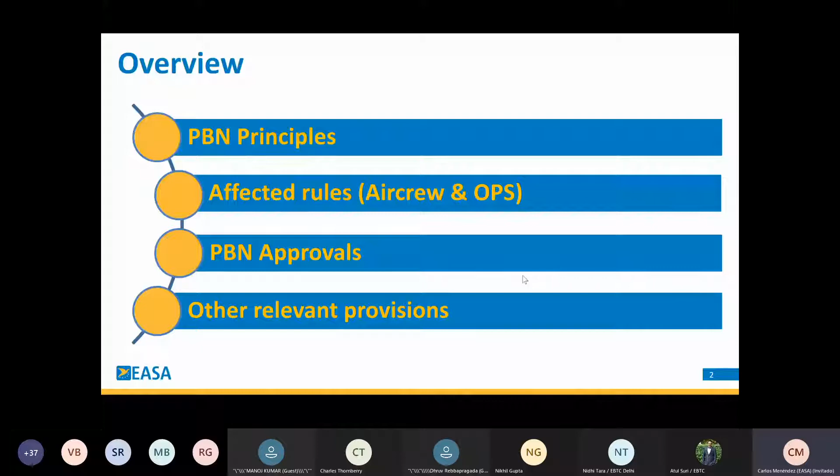The PBN has already been implemented in some countries, and in some it's about to be. This is evolving a lot. There are cost efficiency measures and advantages that should be taken into account, but there are also other challenges related to training and equipment, which is interesting to consider. Talking the same language about this type of procedure is also very relevant and crucial when you try to develop and harmonize these procedures.

So normally when you're trying to include or implement a new technology or development, you need to change a lot of things. In this case we need a specific airspace, and of course we need to implement technology at certain airports. This is also very common when we're talking about new regulations and developments in aviation.

Then you have a new set of regulations, a new set of technical documents, and people need to understand what is going on. Some operators - and I put small operators here, but it's not only the case for them - sometimes it's very difficult for everybody, even other aviation authorities, to understand the principles and implement them. That's another sensitive topic that needs to be addressed when you want to introduce PBN optimization or development in a region or country.

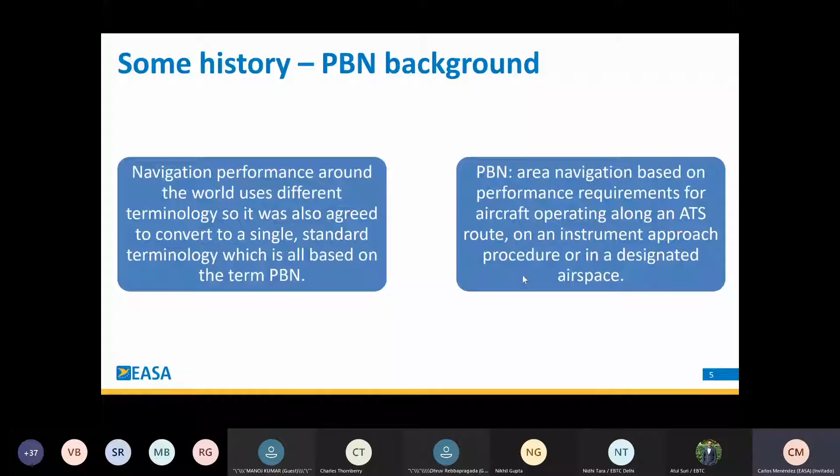So if we're talking about the evolution, and now the recent PBN principles, this is more related to EASA's regulations about PBN. Now we are facing a full integration of PBN into the European regulatory framework, especially for pilot training and air operations. In the past, EASA didn't have the competence to legislate about this, but the regulations in Europe have changed, and now EASA has the mandate to create regulations about this. So PBN regulations are now being developed by EASA.

And now most PBN operations are treated as a normal mode of navigation. In the past, this was the future, but now it is present, and has been for some years the mode of navigation. So now, talking about the requirements for specific approvals.

In the past, there were a lot of approvals needed for different procedures and different types of PBN procedures, but now that has changed, and now what we need is improved pilot training, testing and checking rules, and also performance-based and proportionate operating rules. This change of concept is going to be very interesting, and I think when it's more consolidated, it will create a safer environment, even safer than in the past.

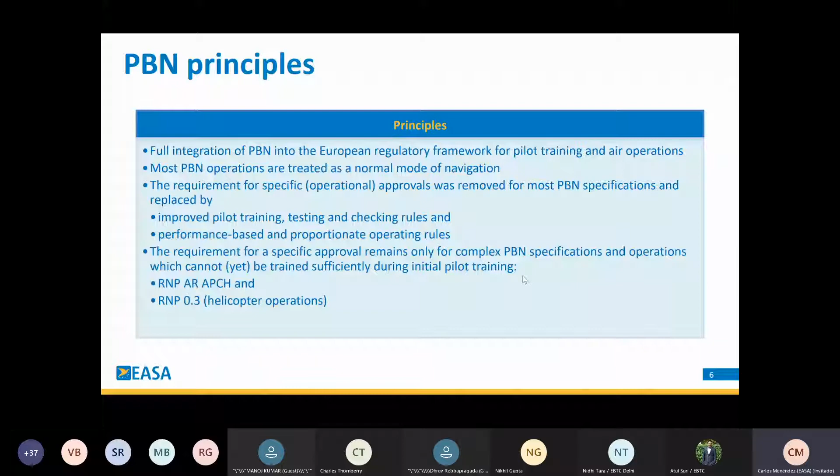So just to highlight four things that are needed to utilize PBN - four main ideas that should be the starting point when talking about PBN utilization and implementation: the aircraft needs to be PBN approved, the operator needs to establish procedures for PBN, the pilot needs to be PBN endorsed, and the airspace requires PBN.

I wanted to highlight this slide because normally when we face the challenges of implementing new technologies or regulations in any aviation domain, we see that we need to involve all the stakeholders. That's the reason why I'm really interested in having all the stakeholders together around the same table or meeting room, or around a screen like today, to exchange different points of view, talk the same language, and share with the rest the difficulties and see how we can improve together.

We need to sit down and understand each other. From the regulatory part, it's very important to be in touch with the stakeholders and to know if they are understanding well, if the regulations are feasible, manageable, and well understood by the rest of the stakeholders.

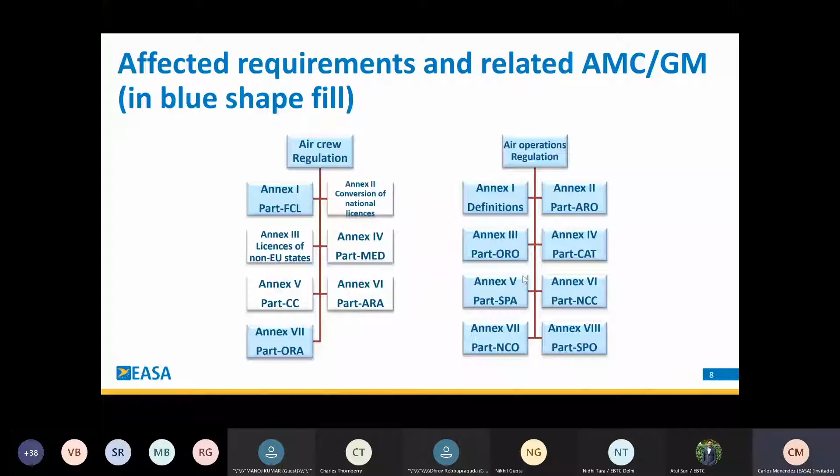There are a lot of initiatives being tested, and some of them already implemented, but making the step of regulating and approving them on a general basis is not easy. The most precise ones are the ones we mentioned before that needed specific approval, the RNP-AR approach, and the 0.3 for helicopters are the ones with more precision. We'll continue to see an evolution of this, using different systems like SBAS, GBAS, and a lot more. We will have more precise approaches like these.

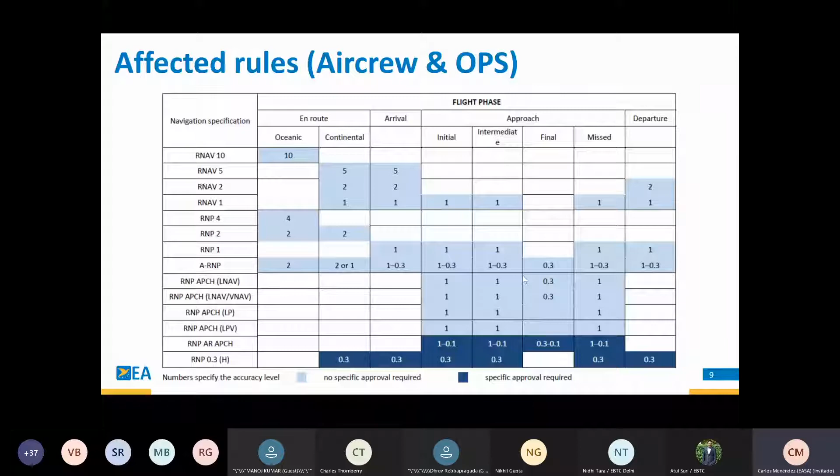Well, that was it from my side today. I hope it was at least a decent presentation. I'm not an air navigation expert anymore, but I tried to do my best. I hope it was interesting for you. If you have any questions, I'll try to answer them later during the Q&A session. Thank you very much.

Yes, thank you very much, Carlos, also for stepping in for your colleague. I think it was a very, very interesting overview. Before we move on to the more technical side, two people have raised their hands, and I would like to have it as interactive as possible. So, Mr. Thakur, you raised your hand, so please come and switch on your camera, and ask your question please.

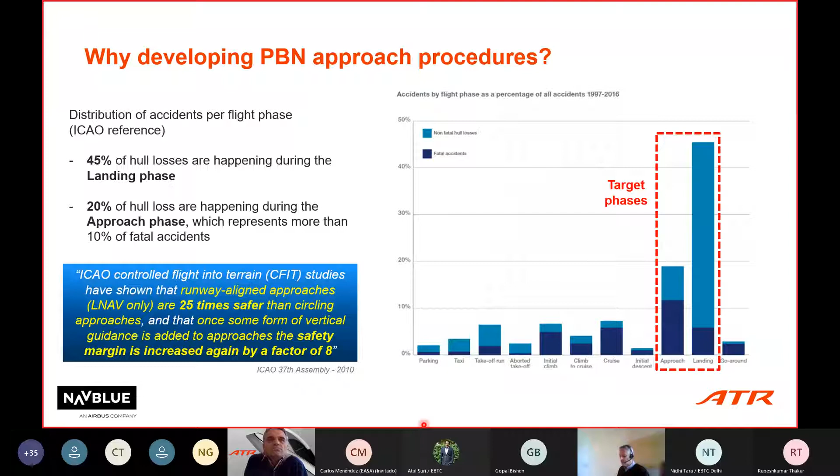From parking, taxi, takeoff run, initial climb, until approach, landing, and go around. What's striking on this chart is that combined, approach and landing are respectively associated with 20% of hull losses for approach, 45% for landing. And at approach more specifically, the darker part of the block shows that more than 10% of these incidents have proven to be fatal accidents. So needless to say, for the industry, for us, Navblue, Airbus, ATR, approach and landing are definitely target phases.

We believe and are convinced that PBN is a key enabler to improve safety. Why is that? Because based on ICAO studies on CFIT, standing for Controlled Flights into Terrain, runway aligned approaches with LNAV only, meaning lateral navigation, are 25 times safer than circling approaches. And in addition, once you bring some form of vertical guidance on top, the safety margin is further increased by a factor of 8. So you see that as soon as you bring in some automation, some vertical and lateral navigation, the safety benefit is going to be tremendous.

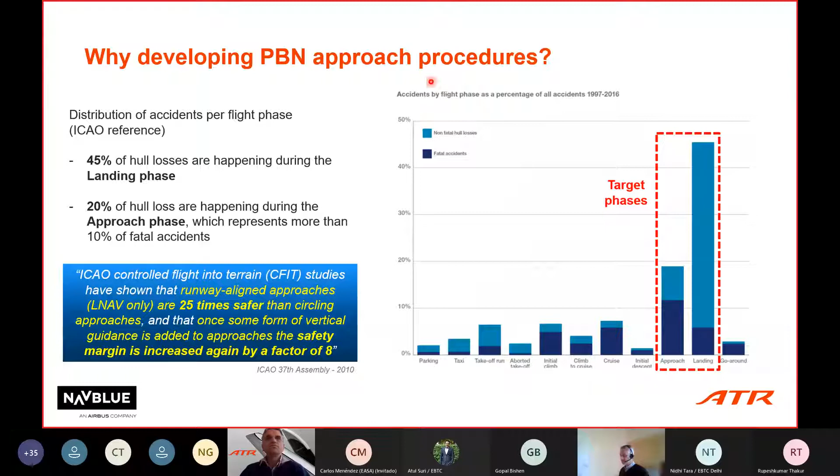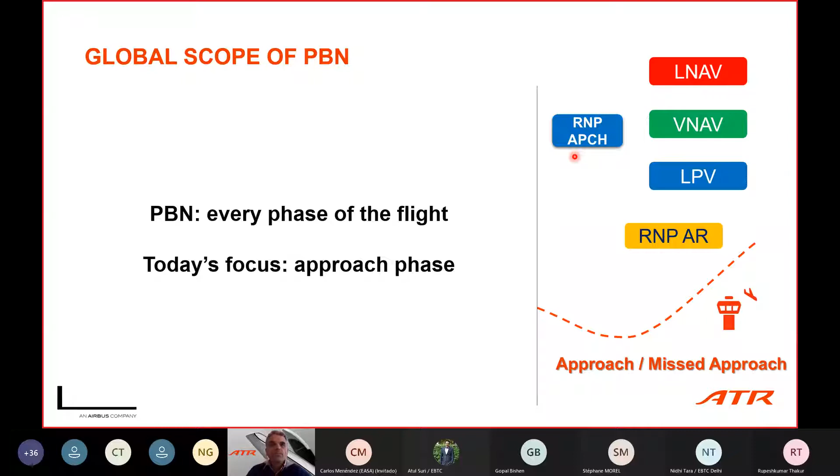Here today we will focus on the approach phase, even if PBN, as you have understood, is all along the flight. On the approach phase, let's focus now on each subpart. LNAV, of course, stands for lateral guidance. VNAV is lateral plus vertical. And just for your understanding, and that was a question raised as well.

I think it was Mr. Thakur, if I'm correct, to assess the minima. The minima, usually LNAV has higher minima than VNAV simply because of the way the approach is designed. LNAV is a two-dimensional procedure, which means that when you design this approach, you have to select the highest obstacle in the approach area, then you add a margin and draw a line or a plane, and you need to have your approach above this plane.

As opposed to VNAV, which is a 3D approach, and you don't need a plane above the highest obstacle. You have to design your approach within a corridor with the same margin. So if there is no obstacle at all, LNAV and VNAV would have the same minima, which is the lowest possible, if I'm correct, 250 feet. But then it depends on the obstacle.

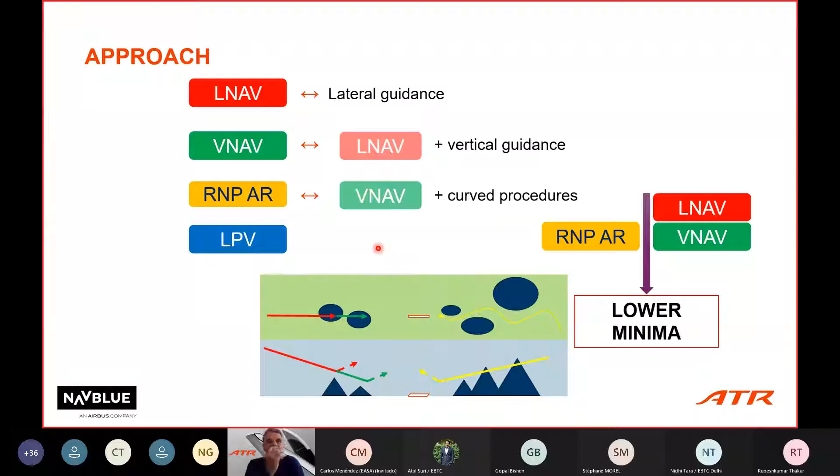This is good news. The big difference between LPV and the others is that you need 2 GPS or GNSS receivers on board. Same for RNP-AR, by the way. But here you do not rely anymore on the barometric altitude.

The approach is designed and the aircraft is guided along a path which has a reference across the ground, not anymore the baro. So you don't rely, you don't depend on the atmospheric condition. You don't depend on the QNH, on the pressure and the temperature, which is a big benefit, of course.

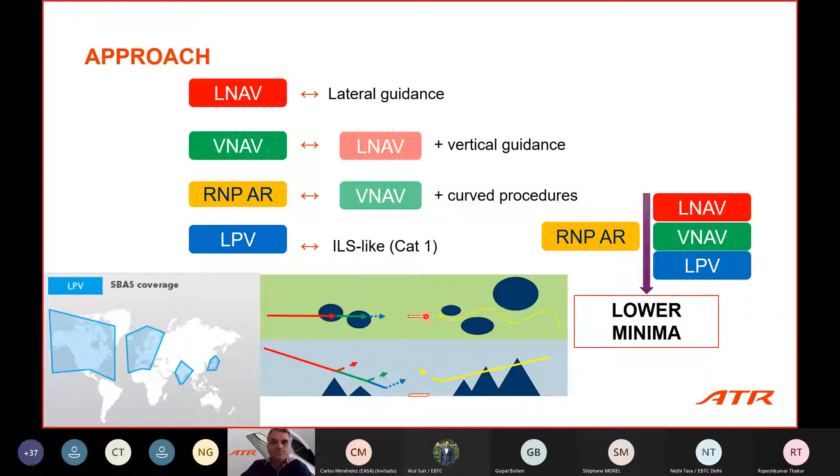Okay, some focus now on vertical navigation. As I explained earlier, vertical navigation, you would be guided through a pipe, a corridor, which guarantees a minimum margin within this corridor, which is much safer. It means that you can easily turn any 2D approach into 3D. This is, again, the beauty of PBN. Even existing 2D approaches, such as VOR DME, for instance, you can fly this with vertical navigation and benefit from vertical guidance coupled with your autopilot.

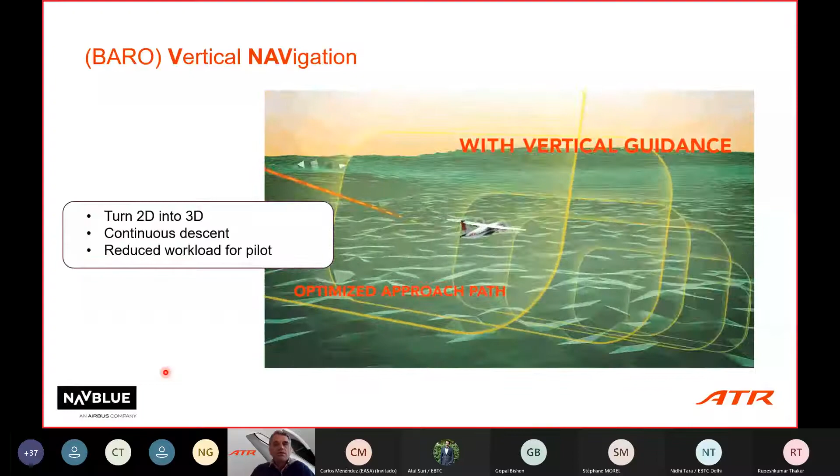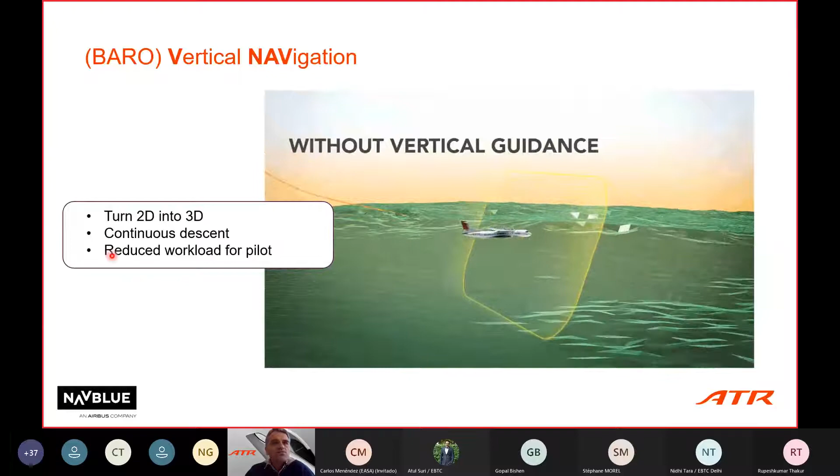It means that you would be guided through the whole approach thanks to your FMS. You will, of course, still have to keep VOR tuned in order to check the signal, but the FMS would guide you thanks to the GPS position, GNSS position. It's a continuous descent with reduced workload for the pilot, which is a great safety benefit.

In terms of benefits, as I explained, VNav would optimize the vertical path. The FMS would compute for you the optimized point of descent, which on average would save 2 minutes of flight time, representing 60 kilograms of CO2 and 20 kilograms of fuel. So that's a safety benefit, as I explained, because it's reduced workload, and you can couple this with autopilot, but it's an operational benefit as well, with significant improvement in terms of environment and in terms of pricing.

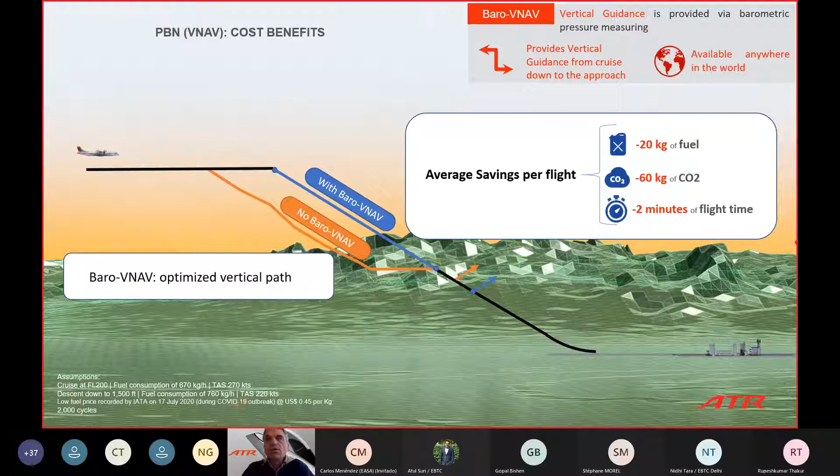20 kilograms of fuel is more or less $9, if I take these numbers which were given mid of July last year, and 2 minutes for us in ATR represents $11. So on average, it's $20 per flight, just a rough order of magnitude.

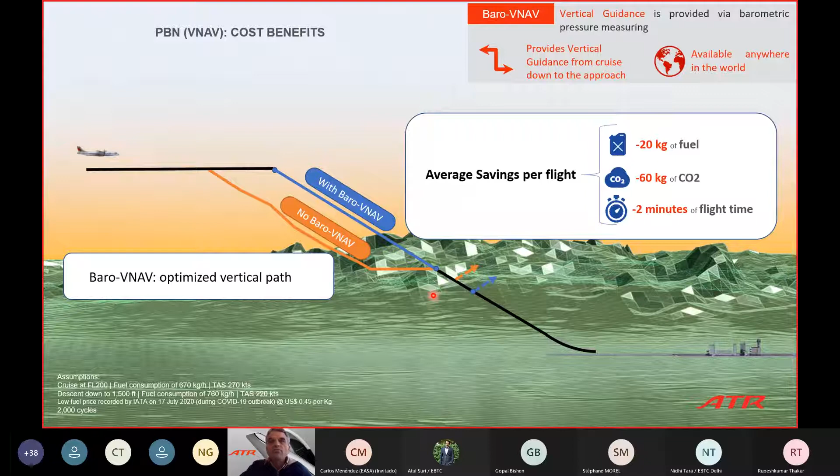Localizer performance with vertical guidance, LPV, I explained already. So you need to have the coverage, which is true in India. And the big advantage for the airport facilities is that you have the same accuracy, category 1, but you don't need to invest or to maintain heavy, costly ground navigation aids. You don't need this anymore, and you have the same capacity down to 200 feet for the same result.

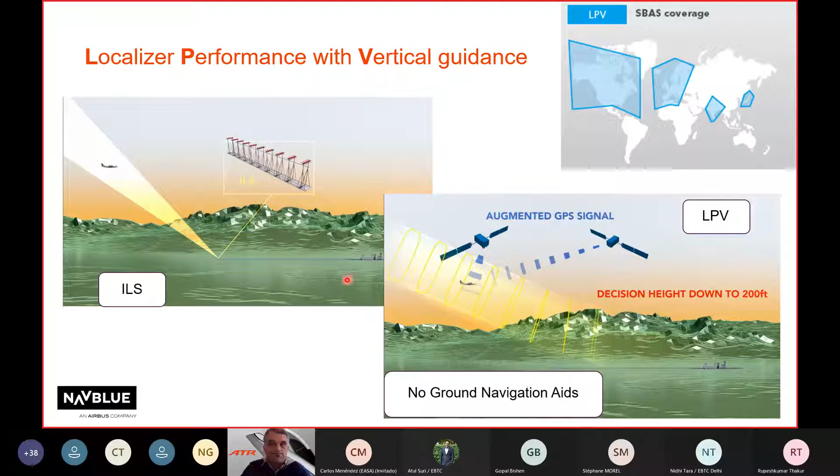Over to you, Stéphane.

Yes, thank you, Géraud. So let me further explain and expand on the benefits of performance-based navigation. As already said, safety enhancement comes at the top of this list, obviously, especially when it comes to navigating in challenging environments at approach. But there are also other beneficial effects in terms of airport accessibility, fuel burn reduction and payload increase, airport capacity increase, and sensitive areas avoidance.

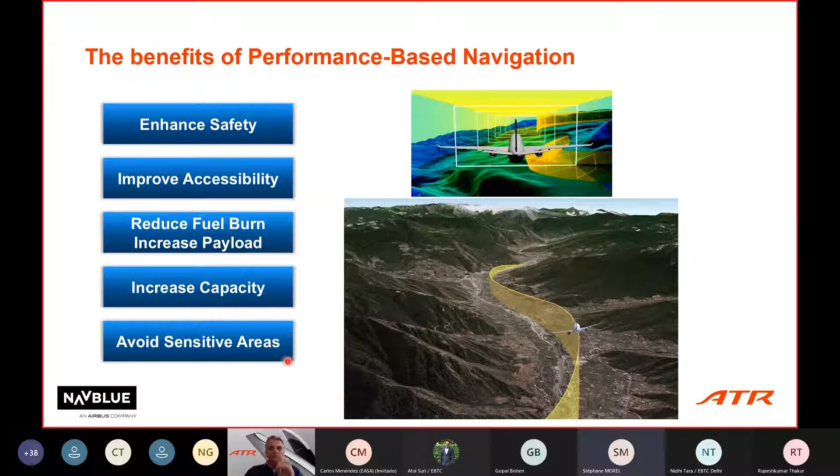So I'm going to support each and every of these items by one concrete example, starting with the safety brought by PBN, and more specifically by RNP-AR at Kathmandu in Nepal. So the picture that you have here is showing Kathmandu runway at the bottom of the valley, and you can also see a number of flight tracks representing approaches and landing on runway 02.

So there is a first group among these flight tracks. Géraud, one click, please. Yeah, this one. This one here corresponds to what is currently operated without RNP-AR. That means that right now the aircraft is approaching straight in and has to overfly the mountains.

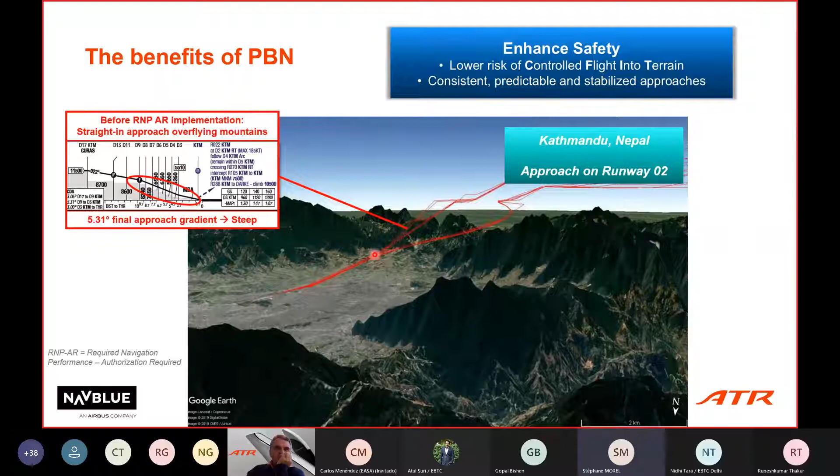which means that the final approach gradient is quite steep. Today, the published gradient on the non-RNP-AR procedure is equal to 5.31 degrees in the final stages of the approach. So 5.3 degrees is quite steep. And the beauty of RNP-AR is that it makes it possible to significantly decrease that gradient. How is that?

Let's have a look at the second batch of flight tracks, the one pointed by the green arrow here. So that may not be so visible on this screenshot, but the RNP-AR approach at Kathmandu is indeed navigating basically in the middle of the mountains. This was already explained by Géraud on one of his previous slides, but basically this procedure will ensure that the aircraft safely navigates in the middle of the mountains, so below the top of the mountains, in the middle of the valleys. What does that mean?

That means that the final stages of the approach are going to be initiated with a lower altitude, which will in turn mean that the final approach gradient is going to be much smoother than the initial one. And today, the published RNP-AR approach at Kathmandu runway 02 is associated with 2.8 degrees, to be compared with the previous 5.3.

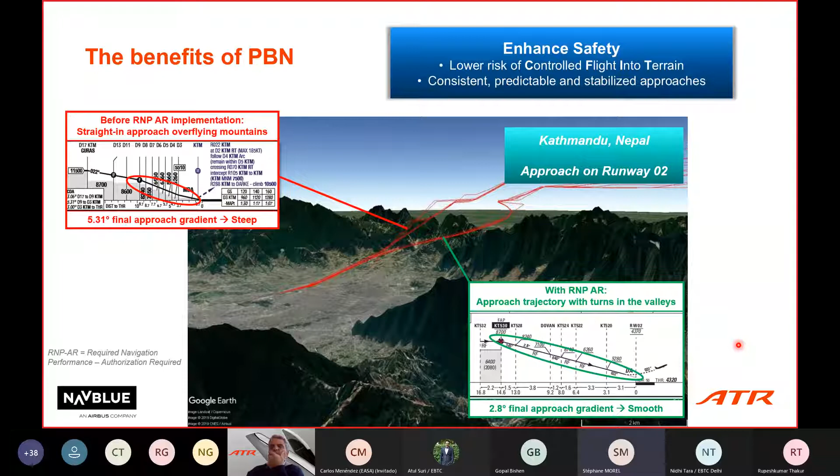Needless to say, this is going to be a significant contributor in reducing CFIT, the controlled flight into terrain incidents. But it will also make it possible to perform approaches which are consistent, predictable, and much more stable. So all of that is definitely very good and beneficial for safety.

Let's have a look now at how PBN can improve accessibility. I will bring you to Vagar Airport in the Faroe Islands, islands located in the North Atlantic. The picture here is showing what the approach looks like when operating non-RNP-AR. You already have a clue of how challenging the local environment can be.

It's really located in the North Atlantic, so that means fog, rain, wind, and turbulent wind.

On the left-hand side, you have a view of what the approach looks like from the cockpit, from the current visual acquisition point, shortly described on the sketch below. The aircraft is following the blue line. There is a visual acquisition point slightly to the left of the runway, and beyond that point the pilot is on his own. He has to perform a tricky manual maneuver to manage this offset, which is not so easy to manage.

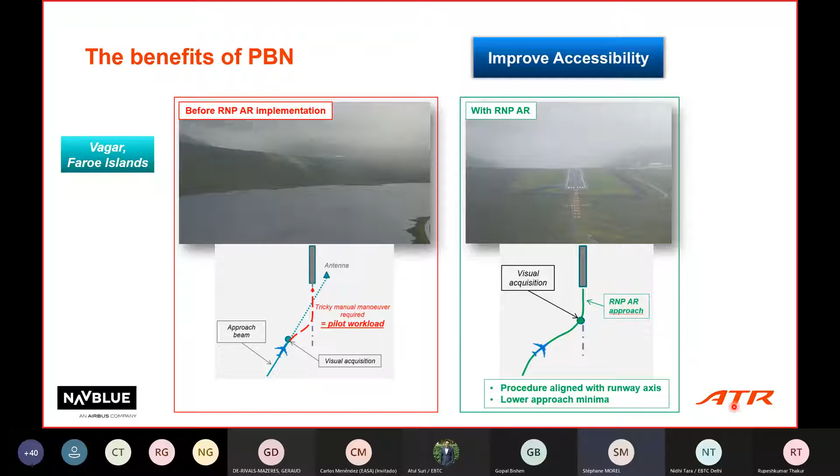Third example is based on Cape Town Airport in South Africa. It's going to highlight how PBN can contribute to fuel burn reduction, or to put it differently, payload increase. The figure here shows the red track, which is the conventional procedure at Cape Town. Arrivals come from the northeast, and if you follow the red track, you have to perform first a very sharp right turn, followed by another sharp left turn to get finally aligned to the runway. So in terms of track miles, this is not so obvious.

That's to be compared with the green track, which corresponds to the RNP-AR procedure implemented at Cape Town. Approaching from the same northeast direction, the aircraft navigates in a much straighter line from the initiation of the approach down to the runway alignment. Compare that with the red track, and it's immediately evident that it represents less miles, meaning less fuel burn or more payload. In addition, the same principles previously described at Kathmandu still apply: the descent is continuous, meaning no level off, no need to decelerate or accelerate to maintain a given path. Continuous also means it's good for fuel burn.

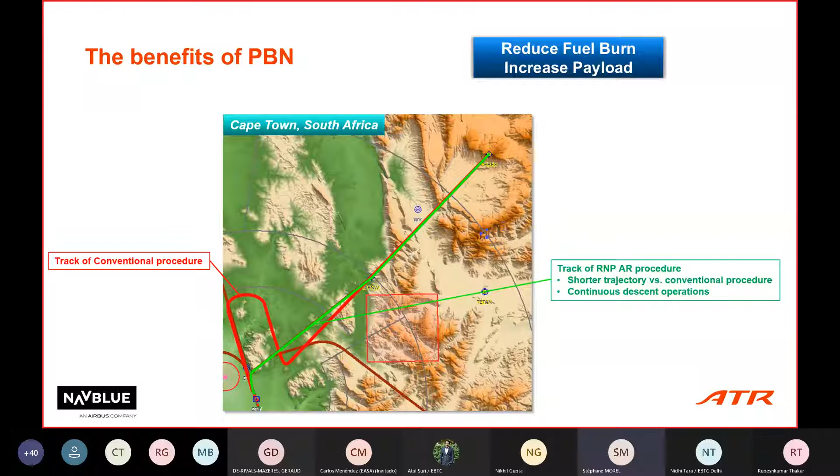Increase of capacity: here is an example of what the terminal maneuvering area of Bogota looks like after PBN implementation. This picture shows a number of well-defined tracks, and this pattern relies on a given number of waypoints or entry points. All these routes are operated in a quite predictable manner, which makes it much easier for air traffic control to manage the incoming flow, because the pattern and scheme is set, and it's basically a matter of making sure the aircraft follow these tracks in an optimized manner. That means much less vectoring and a significantly reduced workload for air traffic controllers.

So the bottom line of that is that it will be a significant help for the ATC to manage and deconflict arrivals versus departures. So you have here a couple of figures.

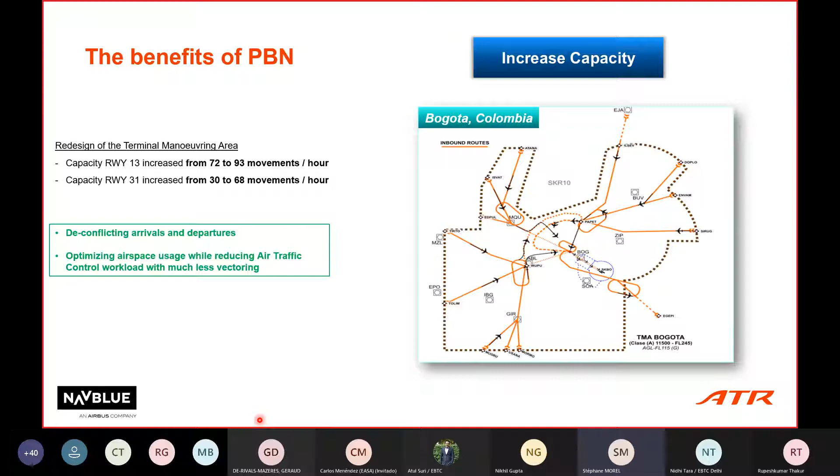All right, and the last example highlighting the benefits of PBN is showing how the flexibility in designing RNP procedures, for instance, makes it easy to avoid any sensitive area.

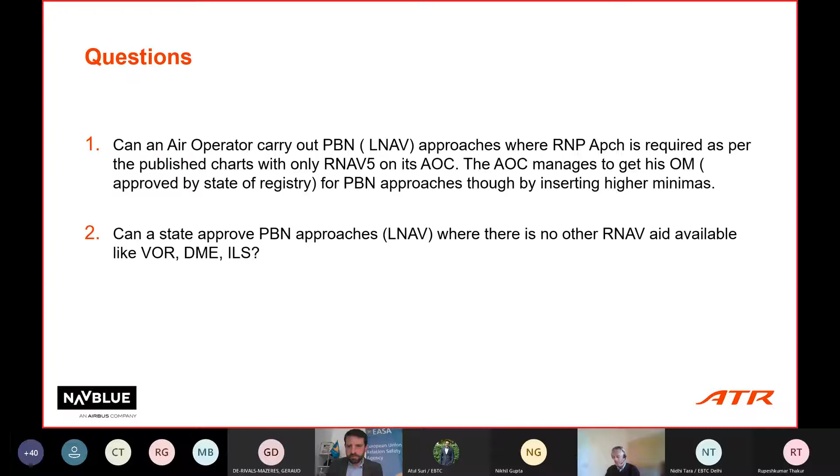You just want to be sure to take care of the availability of QNH information at this airport, and the fact that this airport is instrument capable - capable for instrument approaches. Okay, thanks.

Now another question - most RNP approaches do not conform with PAPI, let us know the reason. Maybe Stefan, you can explain this slide you gave me earlier in order to answer that question. Yeah, sure. Well, this question is related to a remark about what is really specific to PBN operations and RNP approaches in general.

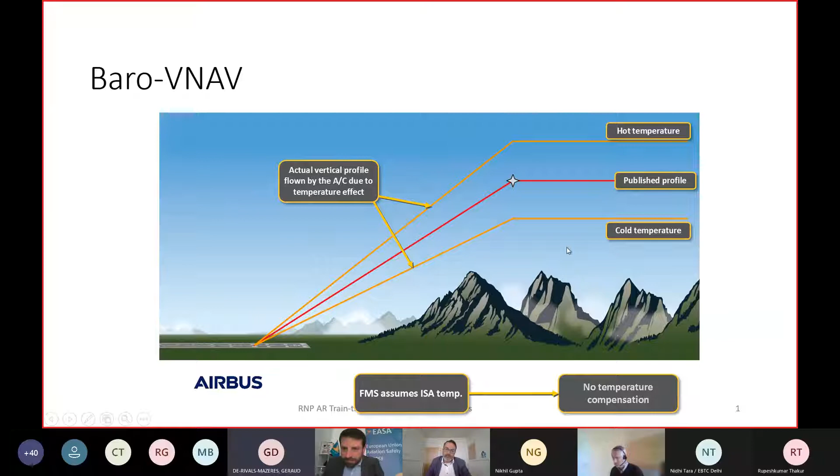Thanks Stefan, that's very clear. So in other words, if I summarize, even if you fly strictly the baro-VNAV, if it's hot you may have 3 whites, if it's cold you may have 3 reds, but it's fine because it has been designed this way.

Okay, I think we already discussed this.

Okay, RNP approach at VFR airport. I think this is precisely the reason for this workshop. Yes, of course we can, but it means that the VFR airport has to be turned into an IFR airport.

So it's over to your local authorities to assess what DGCA means by IFR airport. Depends on the authorities, as I said. What would be the minima? Well, this depends on the approach, whether you design an LNAV or a VNAV, and it depends on the obstacles. So the lowest minima you can get is 200 feet with LPV, provided you have no obstacle at all. And then it depends, I cannot answer to each case.

Missed approach procedures in India are very long. Could it be looked into? Maybe Stefan, as a procedure designer and specialist in NavBlue, can explain, but I guess one by one you can see whether this procedure can be fine-tuned. Depends. Yes indeed, that would be a case-by-case analysis.

But let's say the missed approach procedure by design is part of the game, part of the design process. That means the missed approach track is somehow protected, and there is a way to implement flexibility in this design in accordance with the local environment. So in principle the answer is yes, there is room for shortening the missed approach procedure within the limits imposed by local terrain, environment, and obstacles.